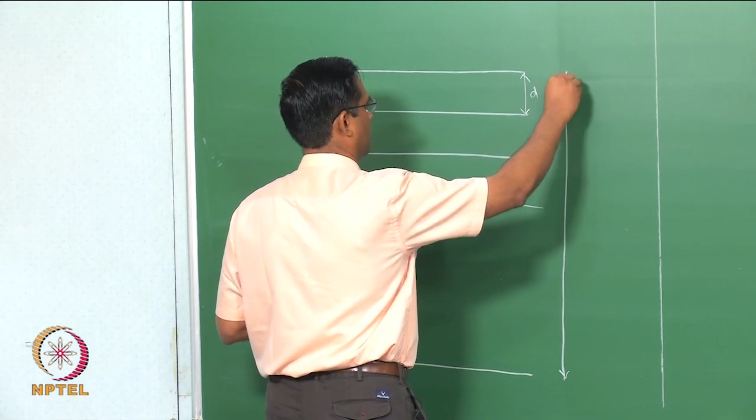Let us assume the spacing between the planes is d, and this is the total crystal we are interested in, with thickness t, which is equal to md, and this is the mth plane.

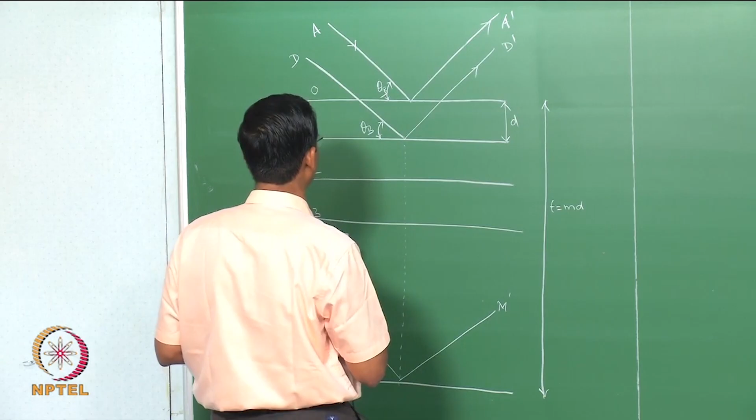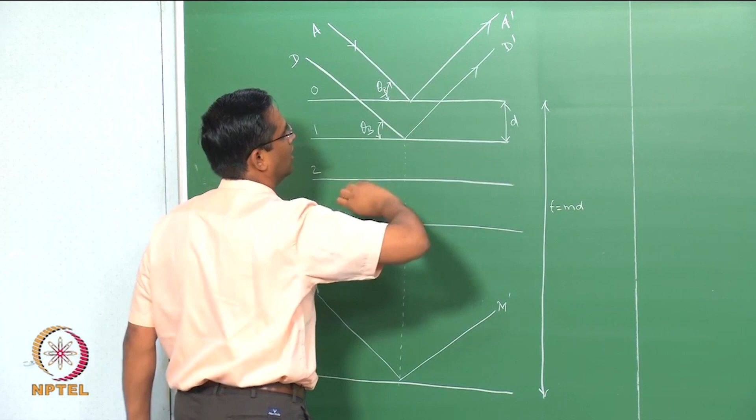This diagram we have already seen, but for the sake of completion let me start describing this. Now what we understand is that the scattered beam A prime will have the path difference from d prime by one wavelength. That is what we have seen, if you assume that lambda is equal to 2d sin theta, as we said. That means these two scattered beams will fall in the same phase, all of them will be in the same phase.

Similarly, when you have the ray m prime, it will be m wavelength out of phase, because it is coming from the mth plane. So this is one wavelength out of phase, this is m wavelength out of phase. Again, m prime, d prime and a prime will all have the same phase, meaning they all will contribute to the diffraction intensity. So that is very clear, that is what Bragg's law states.

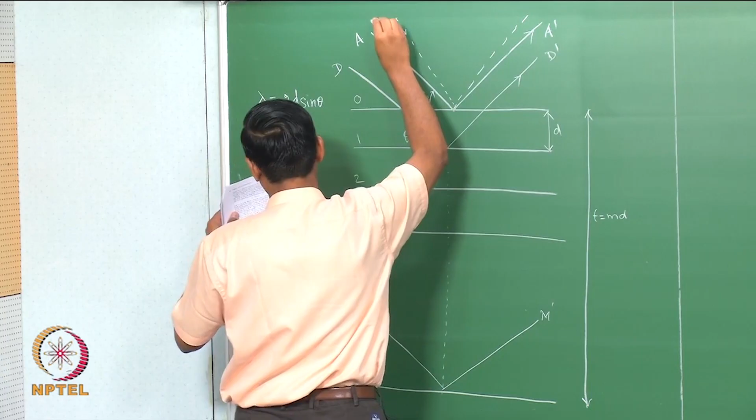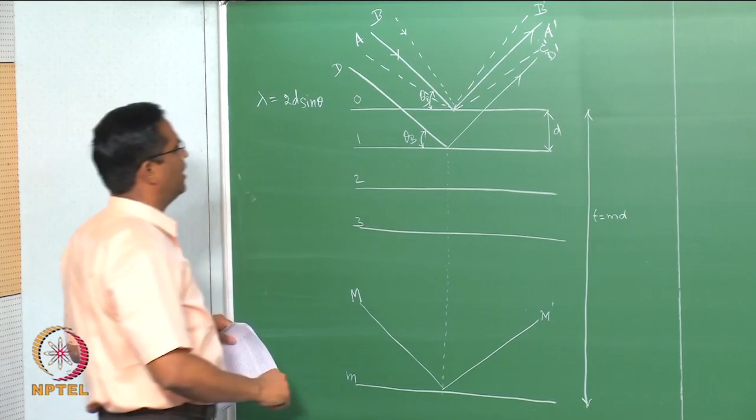Now the question is, suppose I have a beam which is slightly away from the Bragg angle, like this - let us call it B prime, and C prime, and similarly here we can have L prime, N prime. This is the incident beam and this is the scattered or diffracted beam again.

So why do we do this? This is for the M case, for a particular given case, which is why we are comparing these two. Now if you apply the same rule, since theta is slightly different from theta b, it could be slightly excess or slightly lower. In this case it is slightly excess, theta 1, and in this case it is slightly lower, theta 2.

Since it is slightly different from theta b, as I mentioned, the path difference also will be very small, a fraction of an integral multiple of lambda, not exactly an integral multiple of lambda. The consequence is this is not going to...

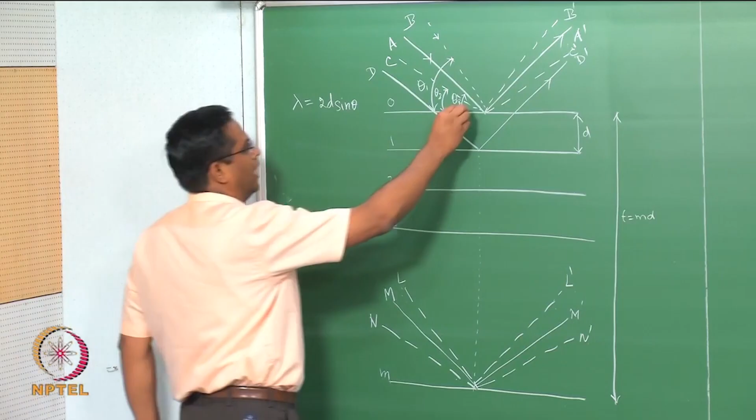So what are we trying to say here? Since you have crystal planes which diffract slightly away from theta b, there exist two limiting angles, because we are talking about 2 theta here, that is what we measure, 2 theta 1 and 2 theta 2. So we are talking about a range of angles which define this. That means within this range only your intensity will be varying, and these are the 2 limiting thetas where the diffraction intensity will become 0. So that is the idea of doing all this.

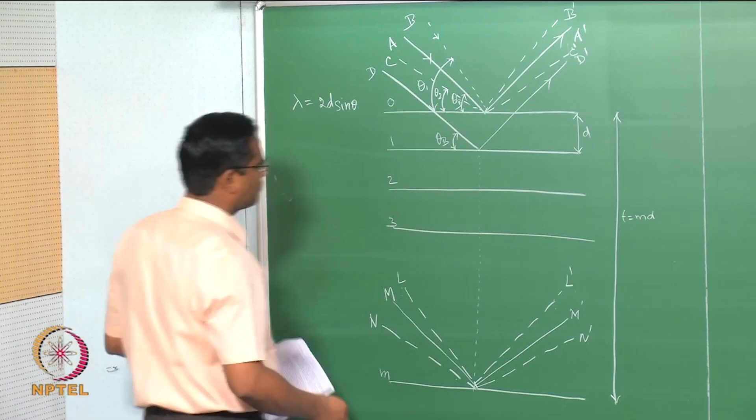So let us now try to write a few points.

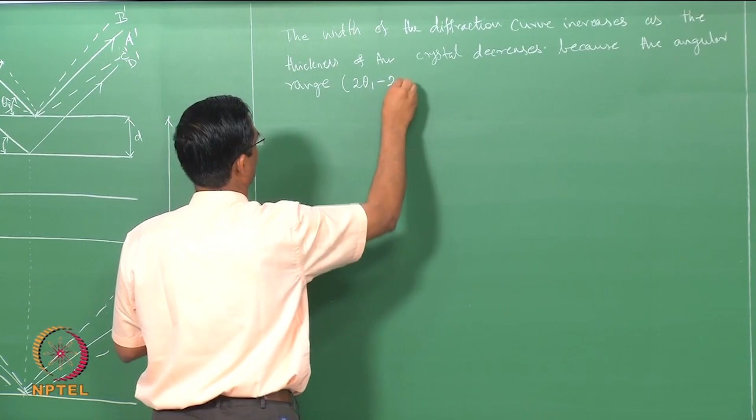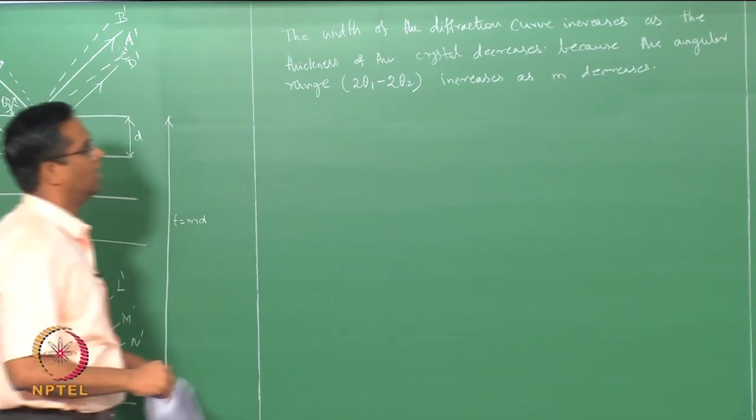So the width of the diffraction curve increases as the thickness of the crystal decreases, because the angular range 2 theta 1 minus 2 theta 2 increases as m decreases. As m decreases and your range increases, that means it is going to cause peak broadening.

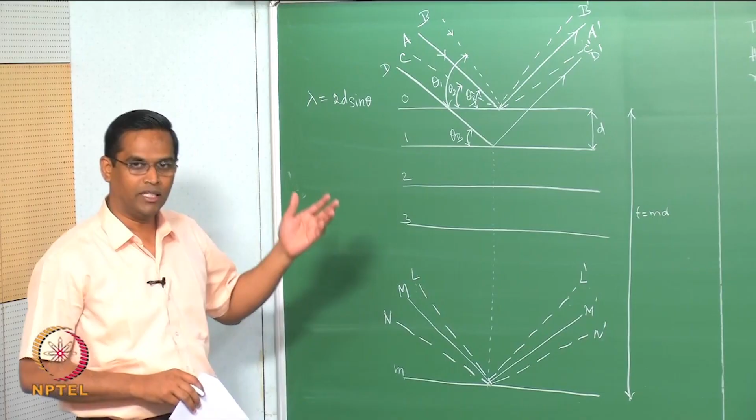So one more point you have to recall, we already discussed in the last class, as the crystal size becomes smaller and smaller, and if we consider this theta 1 and theta 2 slightly away from theta b, then the plane which is going to diffract with half a wavelength of phase difference may not exist. So that is another reason why we will see the peak broadening.

So that is the bottom line, that is the bottom line. So there is a connection between the amount of out-of-phaseness and the crystal size that exists. So this you have to keep in mind when we talk about peak broadening, and one of the primary reasons, the physical basis for the peak broadening, is this: there may not be a plane which will completely make the path difference out of phase.

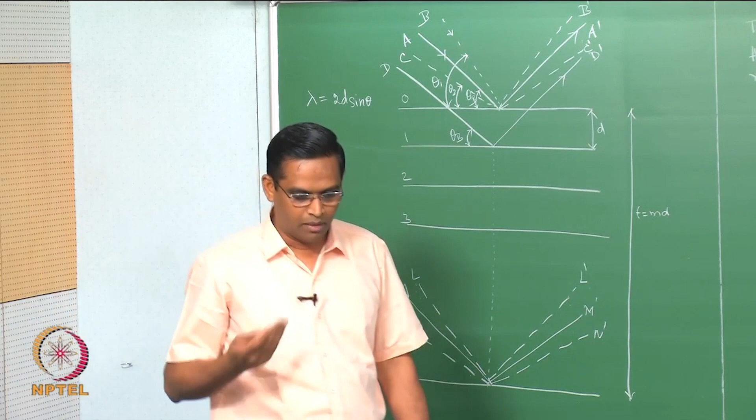So now let us write a rough measure of angular width.

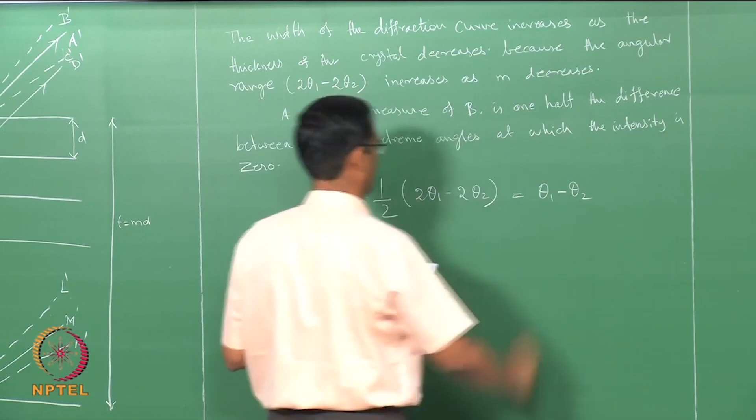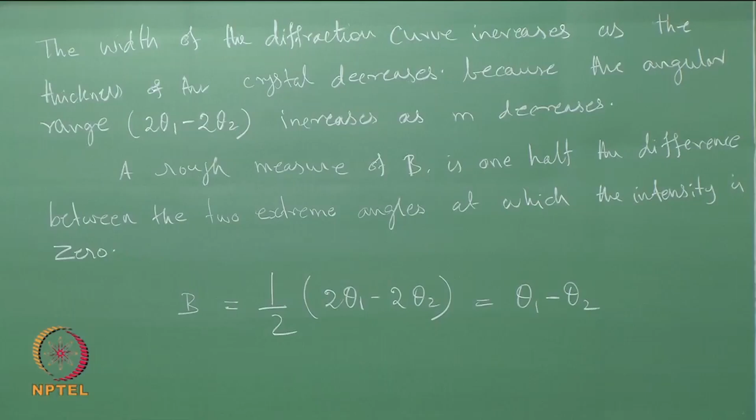Which is nothing but B is equal to half of 2 theta 1 minus 2 theta 2. So your B is measured in the angular range in the diffracted peak. So now you write the path difference of these two extreme angles with respect to the schematic what we have drawn.

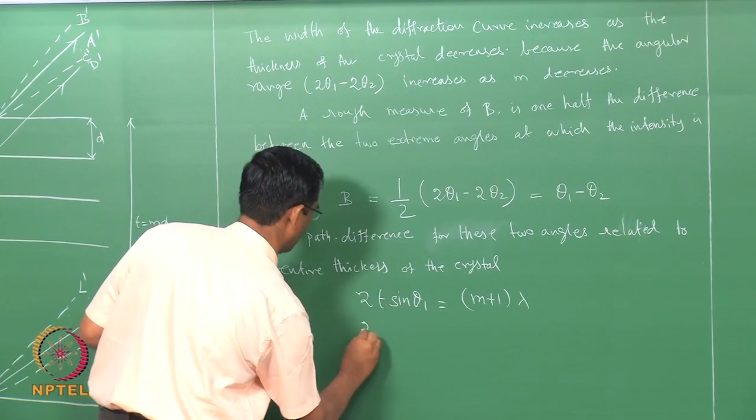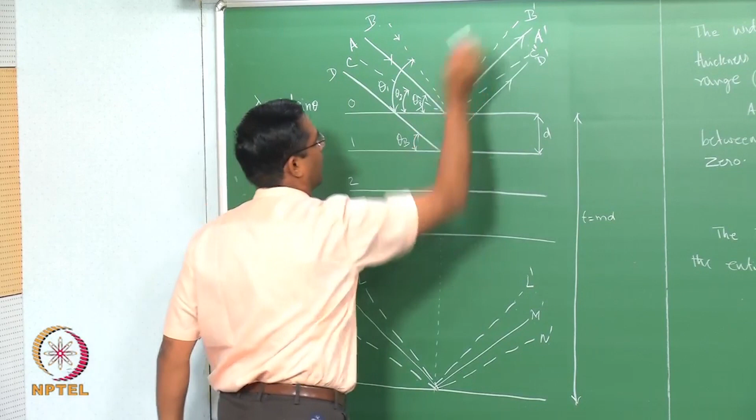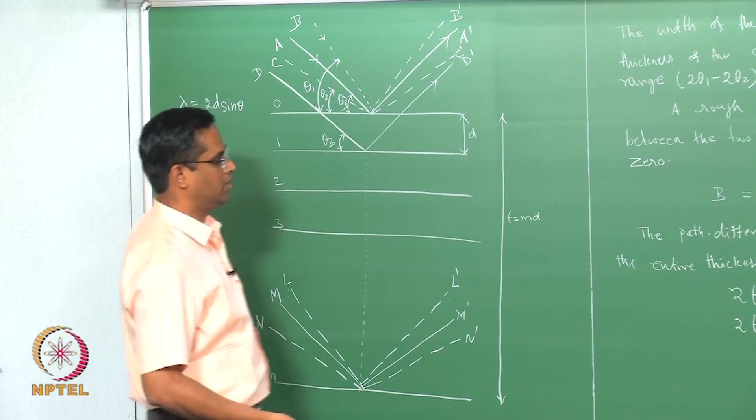So the path difference for the two limiting angles related to the entire thickness of the crystal is 2t sin theta 1 equal to m plus 1 lambda. So that means we are talking about this ray B prime with respect to L prime, they will differ in their path by m plus 1 lambda, and then the second ray which is less than theta b, D prime, will have the path difference with respect to n prime: 2t sin theta 2 is equal to m minus 1 lambda.

So now we will manipulate this by subtraction.

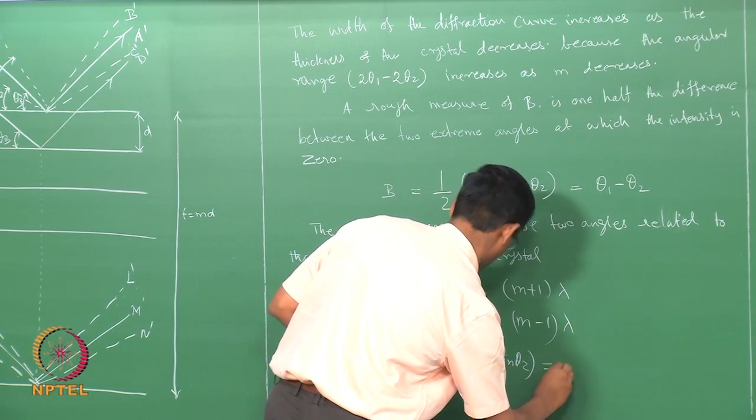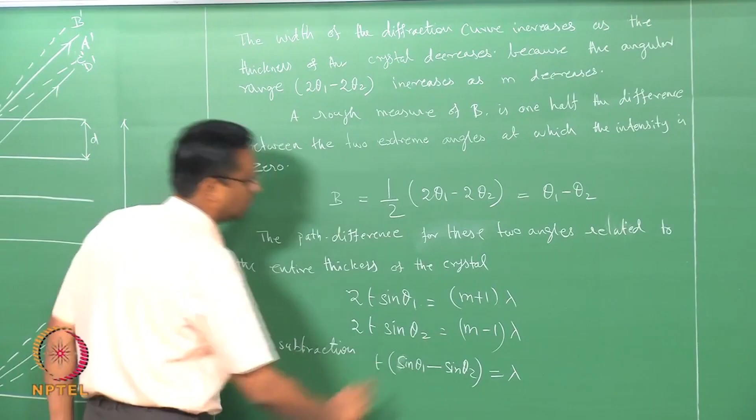So we can use some trigonometric relations to replace this. So we can write 2t cos of theta 1 plus theta 2 by 2, which is equal to lambda. So what we have done is we subtracted these two equations and replaced this with this trigonometric relation, and now we see that some assumption: theta 1 and theta 2 are very small, or very nearly equal to theta b.

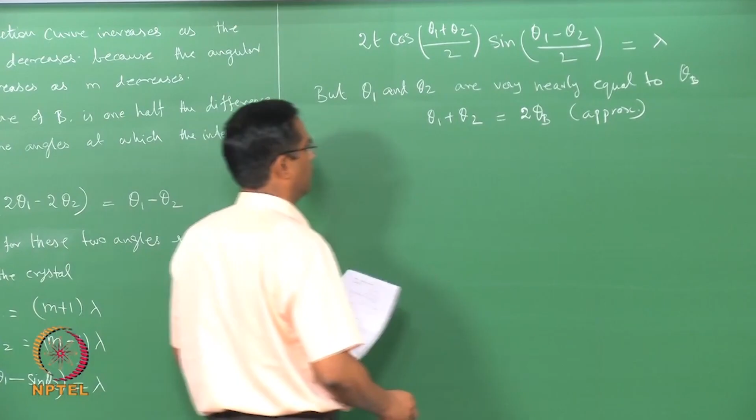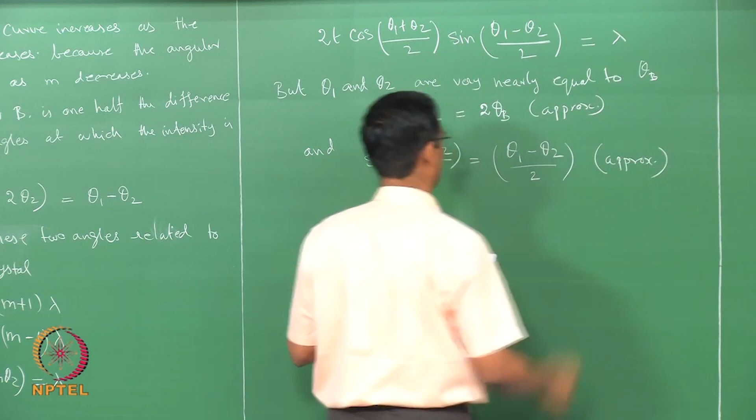Then we can assume this theta 1 plus theta 2 is equal to 2 theta b. This is an approximation to arrive at some relations, and we can also assume one more thing, that sin theta 1 minus theta 2 by 2 is nothing but theta 1 minus theta 2 by 2. This is also an assumption from this.

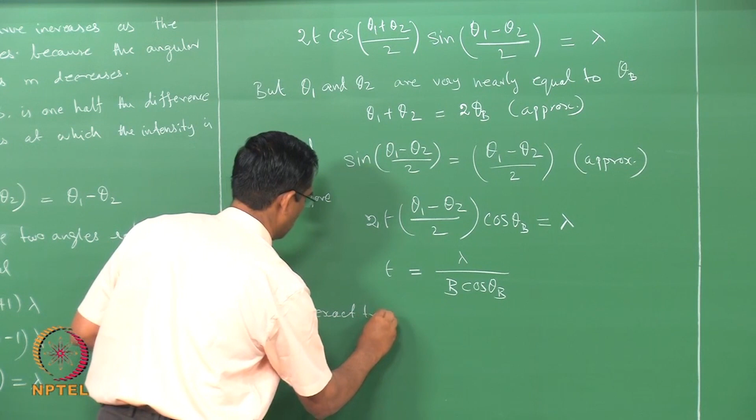Therefore, we can substitute all these assumptions here. So what you get is 2t theta 1 minus theta 2 by 2 cos theta b is equal to lambda, or t is equal to lambda by b cos theta b, and a more exact treatment gives this as t is equal to 0.9 lambda divided by b cos theta b.

So, this is known as Scherrer's formula. We will write it here.

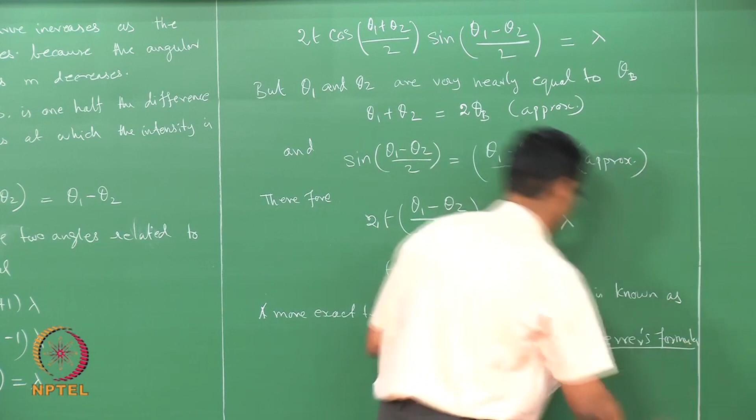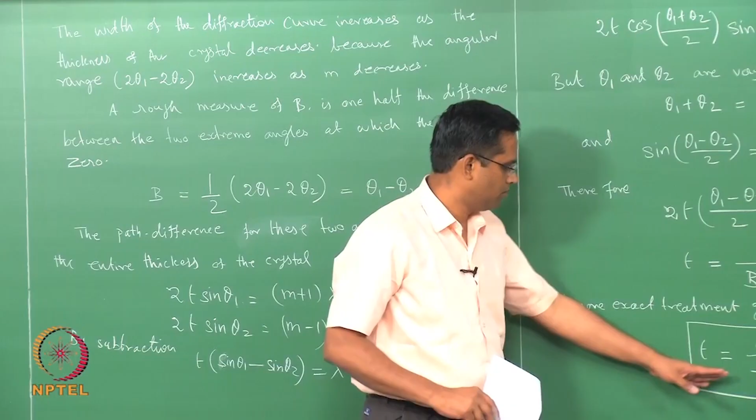Which is popularly known as Scherrer's formula, and most of our scholars use this, especially when we are interested in fine grained material to find out the crystallite size. They use this relation quite often. We will see what precautions we have to take before we explicitly use this, but this is a basic relationship between crystallite size and the peak broadening effect in X-ray diffraction. These are one of the fundamental aspects of X-ray diffraction.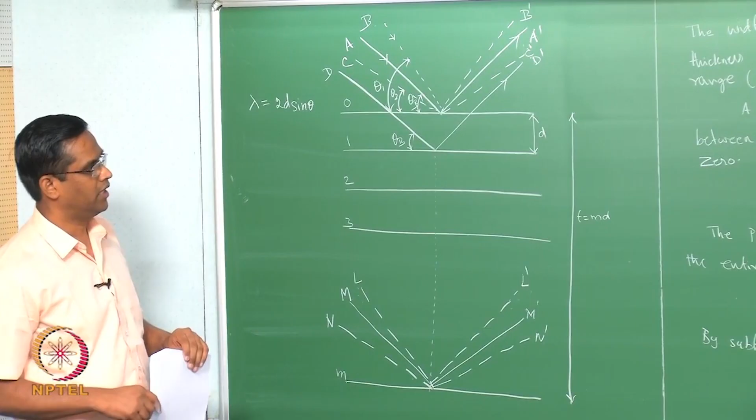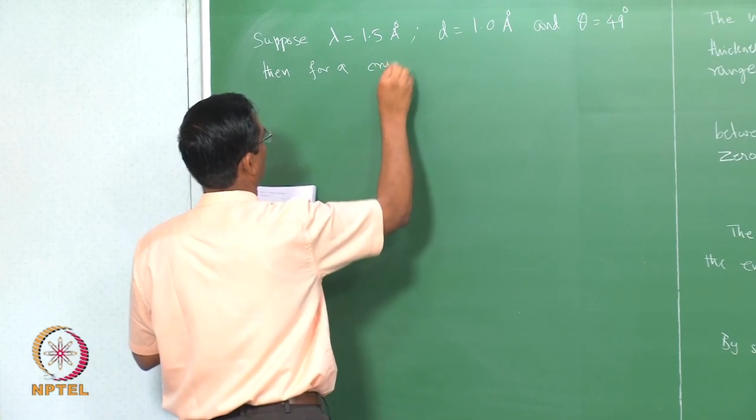So now we will just illustrate this relation with some numerical example. Suppose you have lambda is equal to 1.5 angstrom, d is equal to 1 angstrom, and theta equal to 49 degree. Then for a crystal 1 mm in diameter, the breadth...

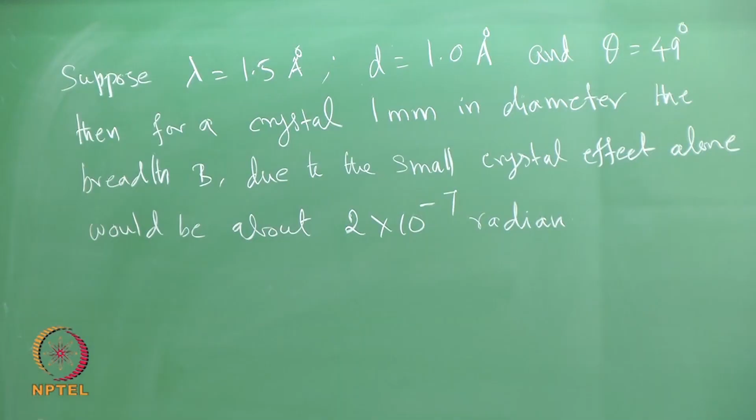So, what I am trying to say is what crystal size effect will have some visible effect on this peak broadening. Suppose if you assume that lambda is equal to 1.5 angstrom, d is 1 angstrom and theta is 49 degree, then for a crystal 1 mm in diameter, the B due to the small crystal effect alone would be about 2 into 10 to the power minus 7 radian. It is going to be extremely small. So what is the size we will be able to see appreciably?

There is some example. For example, we can say that suppose if the crystal size is about 500 angstrom thick, then it would contain...

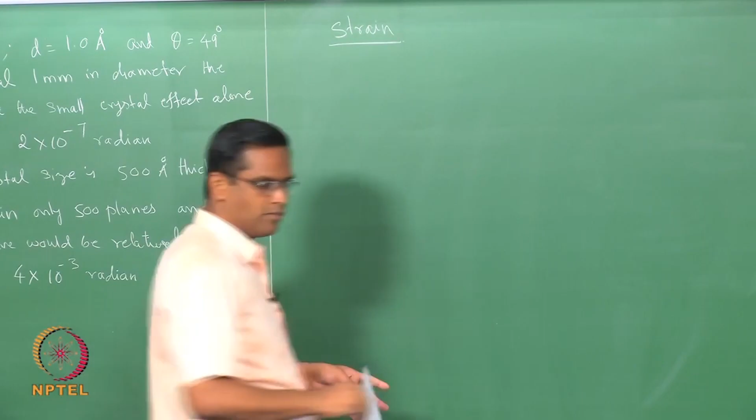So, before we talk about the effect of strain on the peak broadening, you have to bring certain things in mind, especially when we talk about crystal, crystal size and grain size and so on. Suppose if you take any polycrystalline material, it will contain small units called grains, multiple grains of single crystals. So each grain or single crystal will orient with respect to the neighboring grain by some degree. It could be a low angle boundary or a high angle boundary.

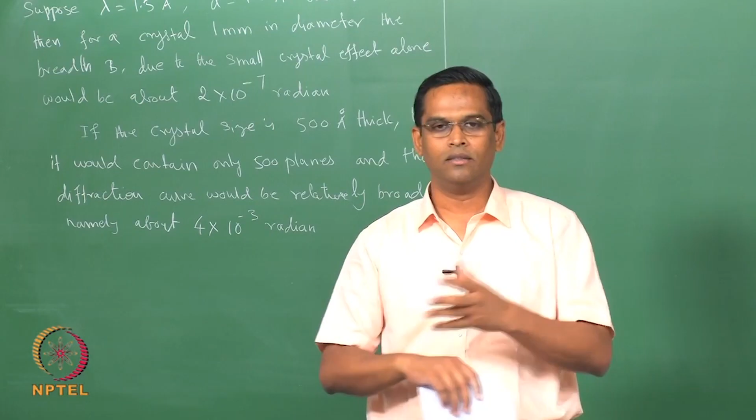So, whatever we just discussed previously about the Bragg theta, here also it will come into effect, because if your neighboring grain is oriented with respect to a given single crystal, even if the angle is extremely small, that orientation is also going to contribute to the X-ray diffraction. So suppose an X grain or X single crystal in a polycrystalline material diffracts at theta b, and if the neighboring grain is oriented by, for example, theta 1, then the diffraction is going to be from theta b plus theta 1. So that effect we are going to consider, similar to what we have seen before. So you have to visualize that we are now talking about diffraction coming from a polycrystalline material containing units of single crystals or grains, and we are now considering diffraction coming from 2-3 different grains together. So, with this background we can discuss the effect of strain also.

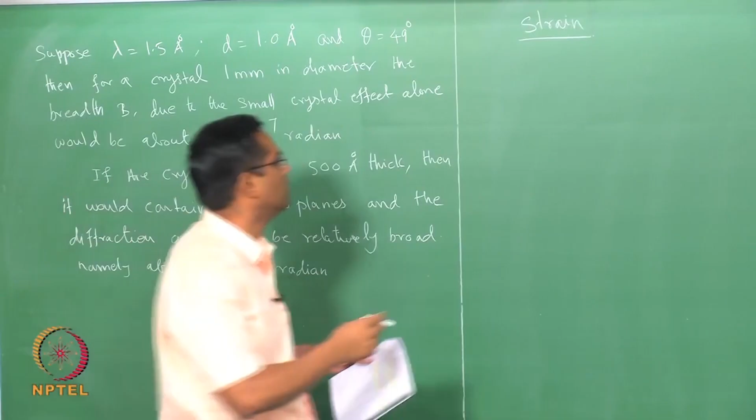So first we will define types of stresses, because what we measure is actually a stress, and then we convert that into strain, or vice versa. If you are able to measure strain, we can convert that into stress. We will see that there are two types.

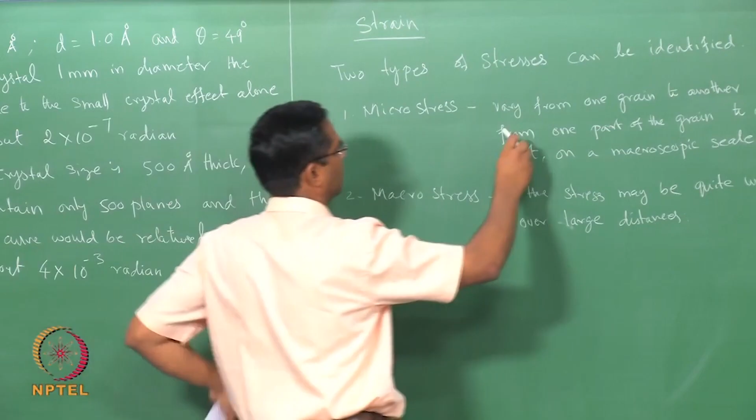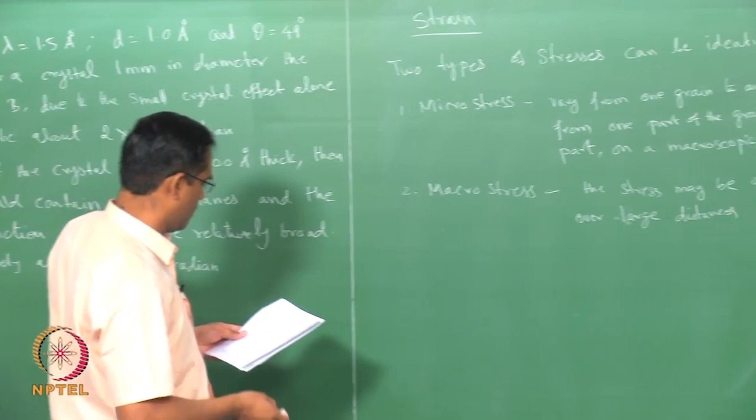So, there are two types of stresses which can be identified through X-ray diffraction. One is micro stress, which will vary from one grain to another, or from one part of the grain to another part on the macroscopic scale. On the other hand, the macroscopic stress may be quite uniform over large distances. So these are the two types of stresses we are talking about here. Similarly, we will talk about strain, both uniform strain and non-uniform strain. To illustrate that, again I have to draw one schematic, then we will talk about it.

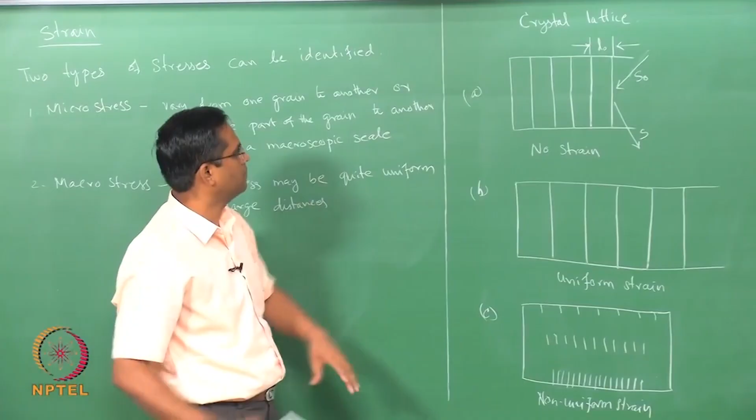So, what I have drawn here is a schematic. Suppose this is a crystal lattice with the planes distance d naught apart, that is an equilibrium distance, and this is the incoming X-ray and this is a diffracted X-ray.

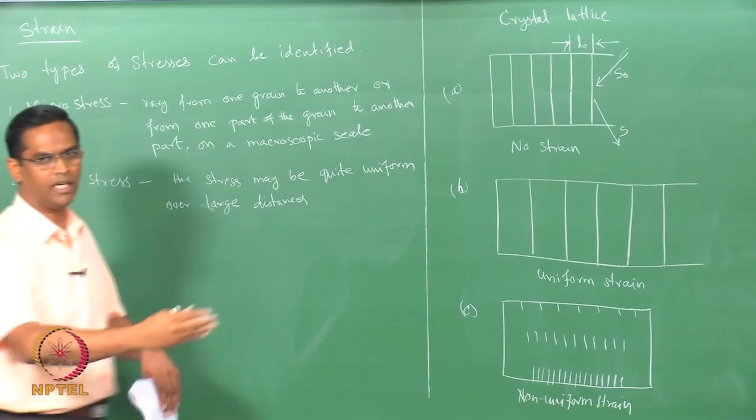So, what we are now seeing is that d naught is equally spaced. We describe this as no strain. Then, if you assume that this plane is being pulled in this direction, and all the d spacing is stretching to a distance away from d naught, more than d naught, then it is called uniform strain.

And in the third case, what we do is we try to bend the crystal like this towards this direction. So, in that case, with respect to the equilibrium position, d naught is going to increase on the top and get compressed at the bottom, and somewhere in between it will be equal to d naught. So, there are three situations.

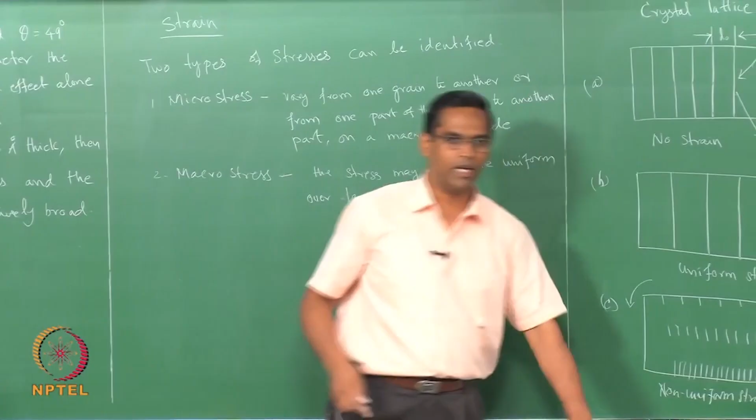One is under tension where d is more than d naught, and on the bottom d is less than d naught, and somewhere in between it will be equal to d naught. Then we say that the specimen, or the crystal lattice, is subjected to non-uniform strain. So, we will now see what is the corresponding diffraction peak line.

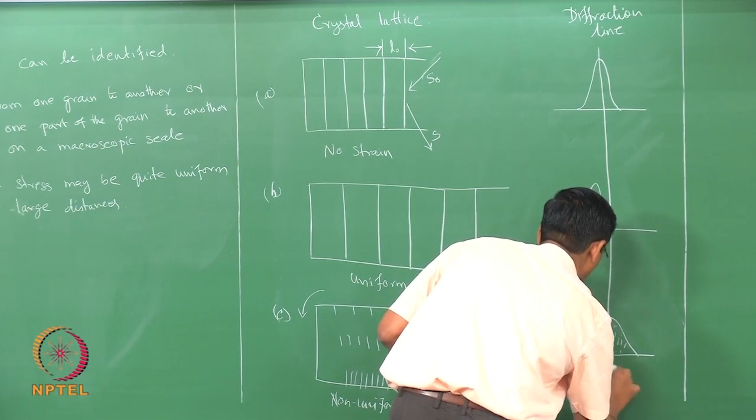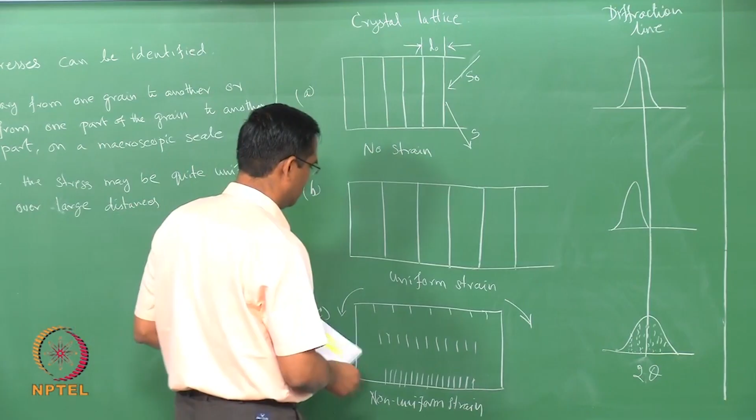So, you see that a typical X-ray diffraction line - this is for the no strain state, you will have a peak like this. If it is uniform stretching, then your peak is shifted to the left hand side. And when you have the non-uniform state, you have a bit of broadening with a little bit of complexity inside.

We will see why it is so. So, the first point to note down here is...

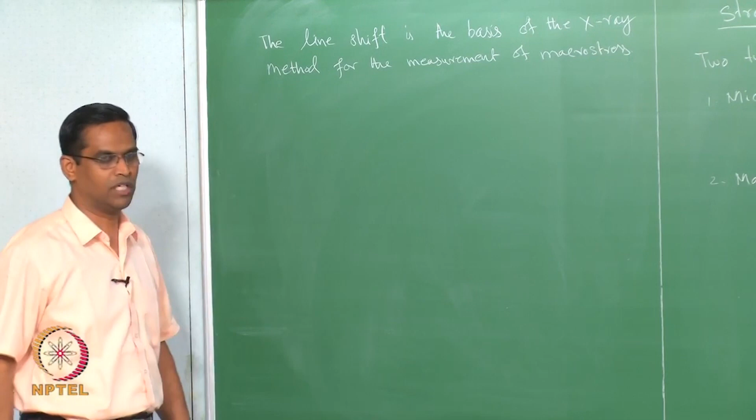The shifting of the line is the basis of the X-ray method for the measurement of macro stress. That is the fundamental information one should keep in mind. Because of this, X-ray methods are used for measuring the macro stress.

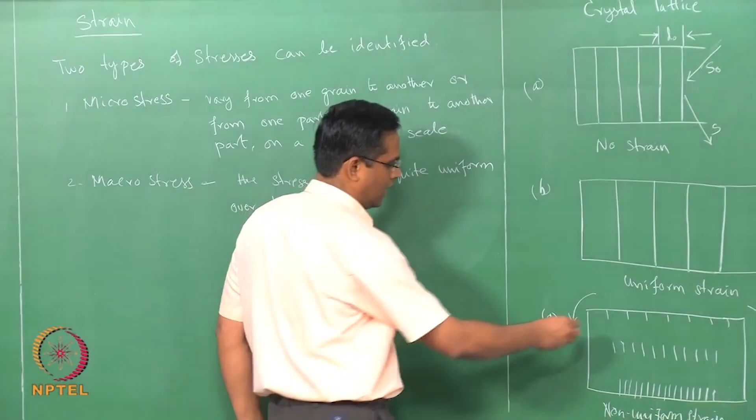And then, like I said, in this particular case where d is more than d naught, and here d is less than d naught, and somewhere in between it is equivalent to d naught - because of that, you will have a region in a grain where the d spacing is constant for some region with respect to the neighboring region within the grain itself.

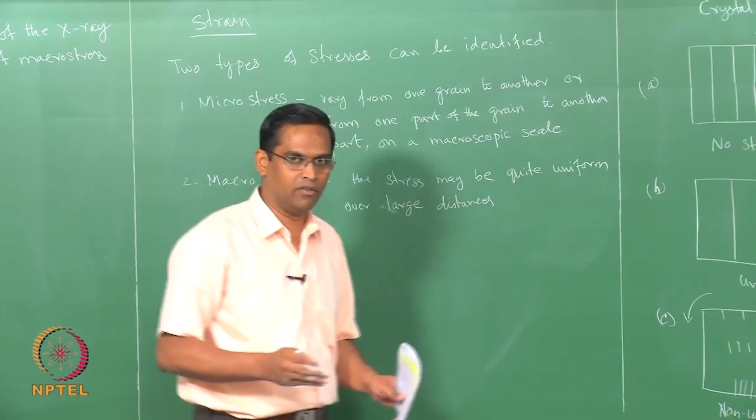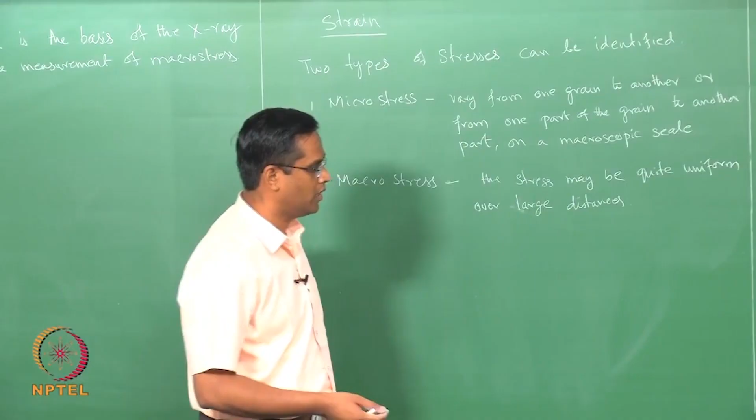So, because of that kind of situation, each one of these will produce a small sharp peak inside, which eventually we observe or record as a broad intensity peak. That is why you see this as a very broad intensity spectrum. We will now see how do we measure this.

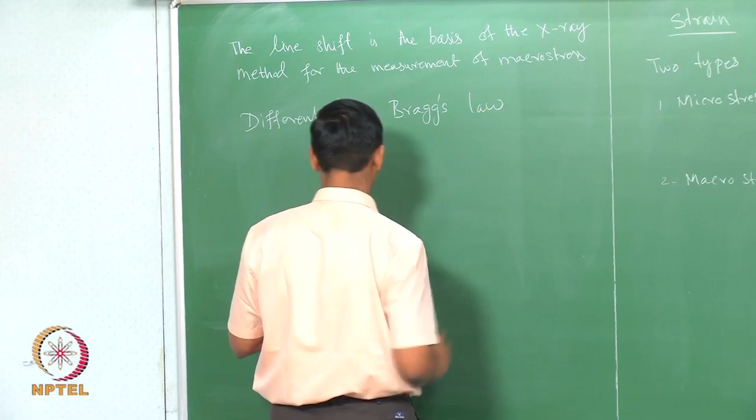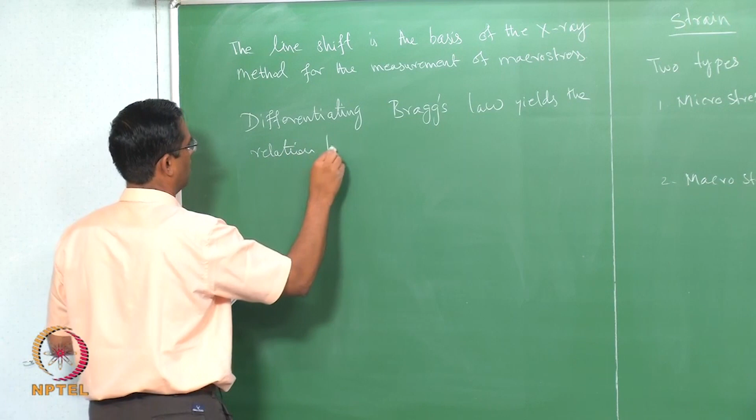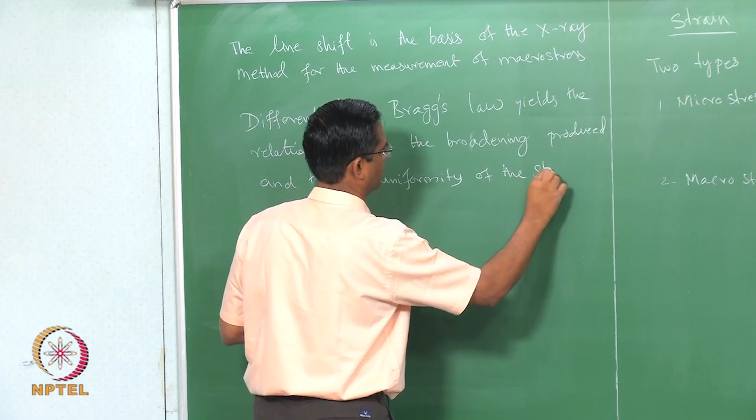So, we can say that differentiating - let me write that equation directly. If we directly differentiate, it yields the relation between the broadening and the non-uniformity of the strain. So, how to differentiate the Bragg law?

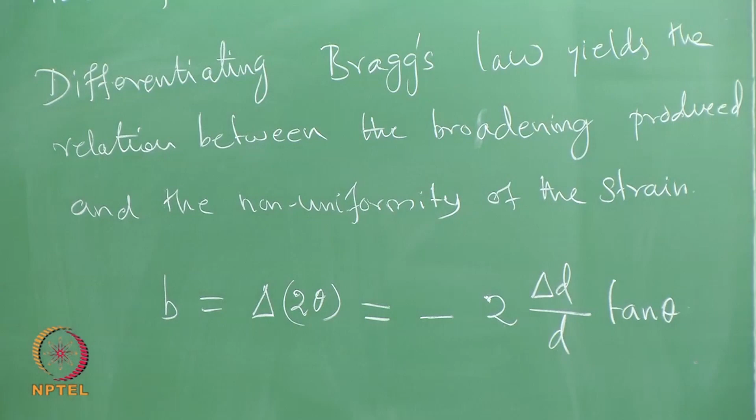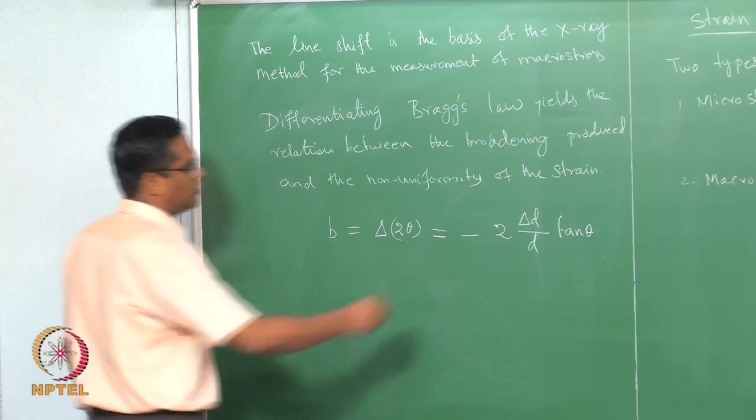You will get a relation like this. You differentiate lambda is equal to 2d sin theta - using a formula like (uv)' = uv' + vu' - and then you will be able to derive a relation between delta theta is equal to minus delta d by d tan theta. But what we measure is 2 theta, not theta. So, delta theta can be written as delta 2 theta is equal to minus 2 delta d by d tan theta. So, this is the expression where B is...

B is the extra broadening over and above the instrumental broadening.

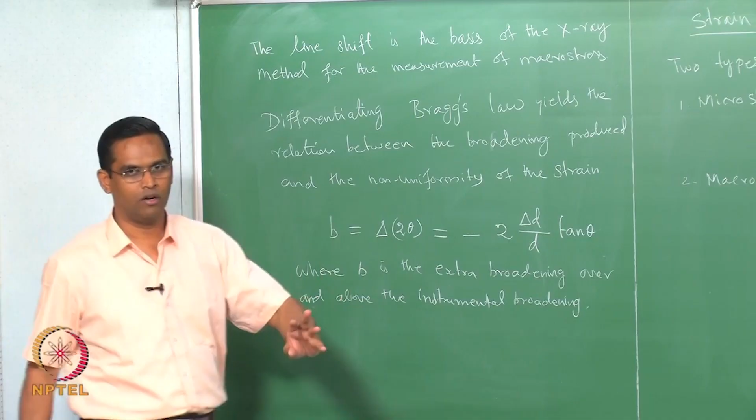So now the question is, we are talking about peak broadening because of crystal size. Now, we also talk about broadening because of instrument error and broadening due to strain. So how do we separate these two? How do we know that a particular amount of broadening is because of the strain or because of the crystal size? That aspect we will discuss in the next class.